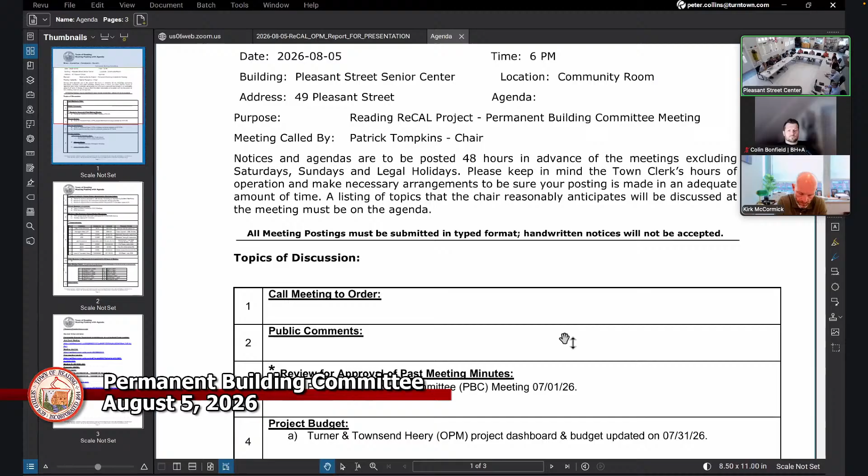So, first item on the agenda, public comment. Is there any public comment? Not seeing any - is anyone online with their hand raised or anything?

Okay, moving on to the next item, review and approval of last month's meeting minutes. I trust everyone got the meeting minutes and had a chance to review them. Did anyone have any comments or questions?

Yeah Pat, this is Kirk - it mistakenly says that I was present for the last one and I was not. Okay. Anyone else have any questions or comments?

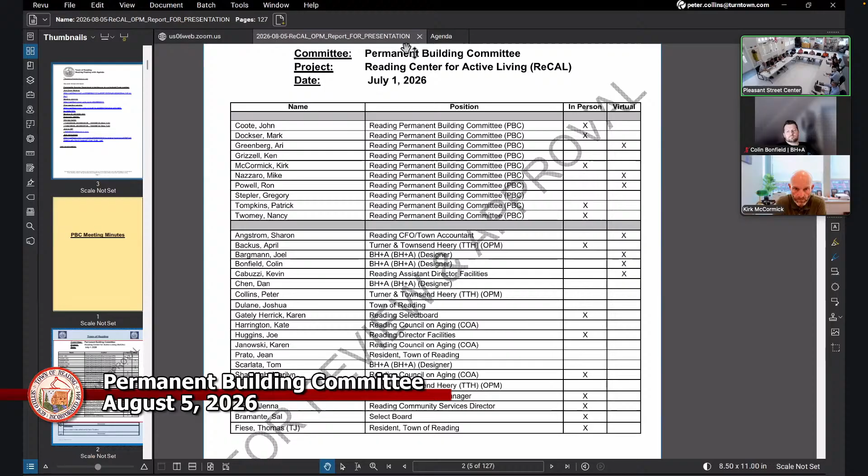Someone wants to make a motion? Mark's got that job tonight. Move to accept the minutes of, sorry, 7/1/26, as amended. Okay, so...

Any discussion before we vote? Nancy's not here, so I'm gonna ask Mike Nazzaro to vote in her stead tonight. So no further comments, go to vote: John Coote, yes. Mark Dockser, yes. Kirk McCormick, abstain. Mike Nazzaro, yes. Ron Powell, yes. Greg Stepler, yes. Pat Tompkins, yes. Motion passes.

With that, I'll turn it over to Peter for the project budget. Hey, good evening everybody, thank you. A couple of things on item 4, just 2 items: the dashboard and then the budget itself.

Jump to the dashboard, a little bit of an update to it. This is just a snapshot of the items within the budget and the schedule, as opposed to thumbing through multiple pages of the budget and multiple pages of the schedule. More details are certainly within the report itself. I won't go through every line item, but you can see column A and B. There's a couple of tables. I can scroll so you can see the full screen.

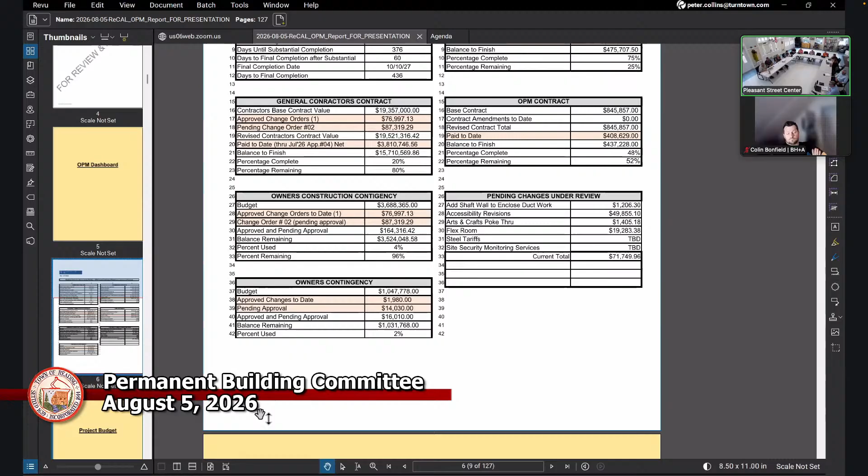And the other side of the report is just the designer's contract: the basic services, the reimbursables, the approved amendments, pending amendments, revised contract total, paid to date, balance to finish. You can see those numbers similar to the other side, 75%, 25% remaining. Same with the owner's contract, OPM's contract, excuse me, same numbers, same sort of formulas: contract base amendments, revised total, paid to date, balance to finish, percentage complete, percentage remaining.

And then the next part is some of the pending changes that are under review now. You can see them listed there, rows 27 through 32 in column C. So that's just a quick snapshot, one-stop shopping for information as opposed to thumbing through the other reports, which are also attached. I can go to the budget next, if there's any questions on the dashboard.

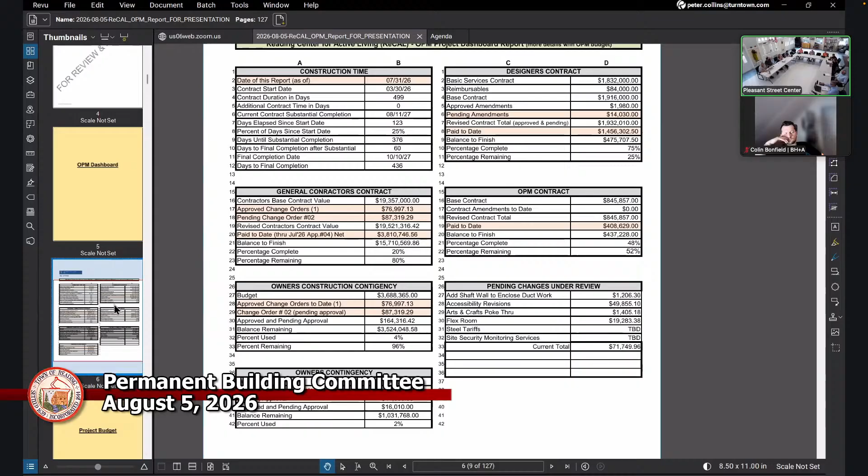Can you give a little explanation as to how you're using the owner's construction contingency versus the owner's contingency? What costs would it affect? You touched on it a little bit - we talked about it a little last month. Yep, I'm going to explain. So I thought it'd be worth you just explaining, in your minds, what you're doing there. Sure, so here's the budget report itself.

Maybe scroll up to start off with the construction contingency. It's shown right here on rows, cost code 500, 200, on row 218. The initial contingency was 1,097,000. We had some construction bid savings of 2.5 million. All combined is 3.6 million.

We turn around and against that, change order number one is $76,997. And quite frankly, I did not update change order number two - it should be 164,000. That was a last minute adjustment, which you saw last night. In any case, I'm taking anything related to the general contractor's contract with respect to change orders and managing the money as a construction contingency allocation.

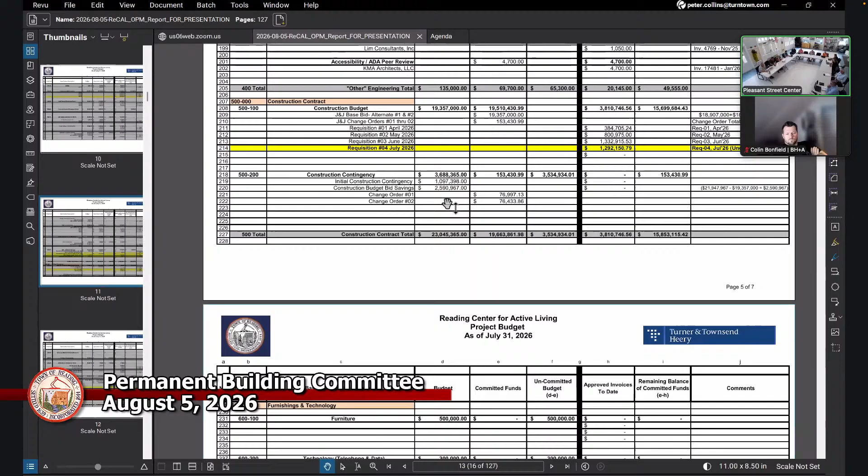With reference to anything outside of construction, I'm putting it down and managing it through the owner's contingency, down towards the bottom of the budget, cost code 800,000. Owner's contingency, again, the base contract was $1,047,000.

We moved some money around a little bit, as you can see here. I moved some money, cost code 300,800, up to additional services for the architect under Amendment 2, which was the $1,980. And what's it for? Over here on the right-hand side, under column J, it was the site survey benchmarks that we did a couple of months ago.

We also moved - what did I do next - then this evening, under rows 275, again I moved $14,030 from the owner's contingency up to the additional services for the design team, the A&E, under cost code 300,800. And that's what we're going to discuss this evening - that's for designer services related to the flex room and the maker space. So that's essentially how I'm currently managing the two different contingencies.

Anything nuts and bolts, construction, J&J, is construction contingency. Anything outside of that is owner's contingency.

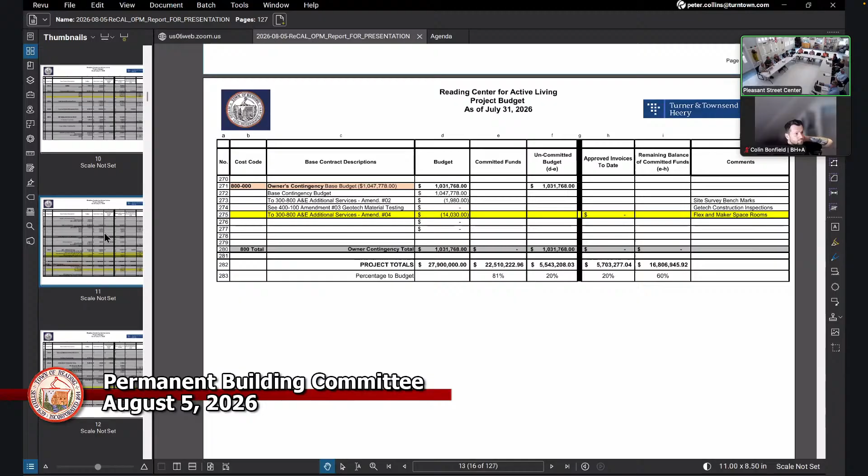Thank you. Questions - so, with respect to the budget on the report this evening, I'll just start on this page. No update besides what's highlighted in yellow and what we just discussed. Some invoices here that are highlighted in yellow.

Under the 300, 800 I mentioned, the monies were moved from the owner's contingency on row 167, cost code 800,000, owner's contingency, and we added it up here to 14,030, which is on the agenda this evening for further discussion to approve said amendment for the design team for those two spaces, flex room and maker space. They've also invoiced partial invoicing against those two amendments that the design team has already performed services on, which is another discussion this evening as well.

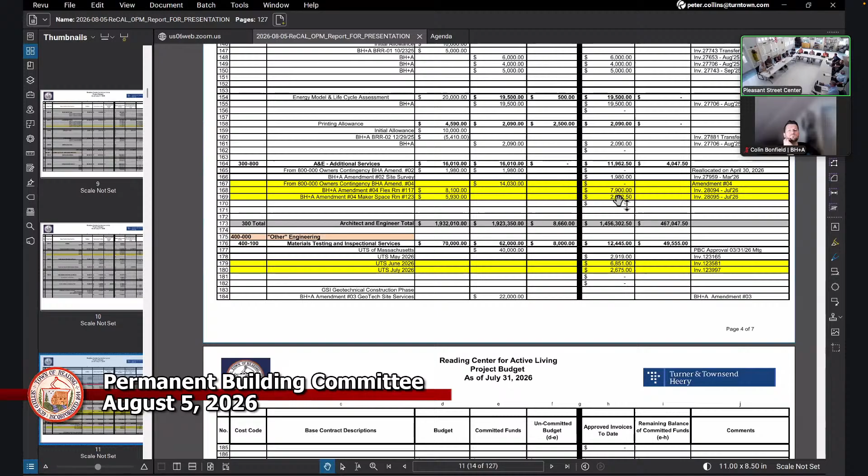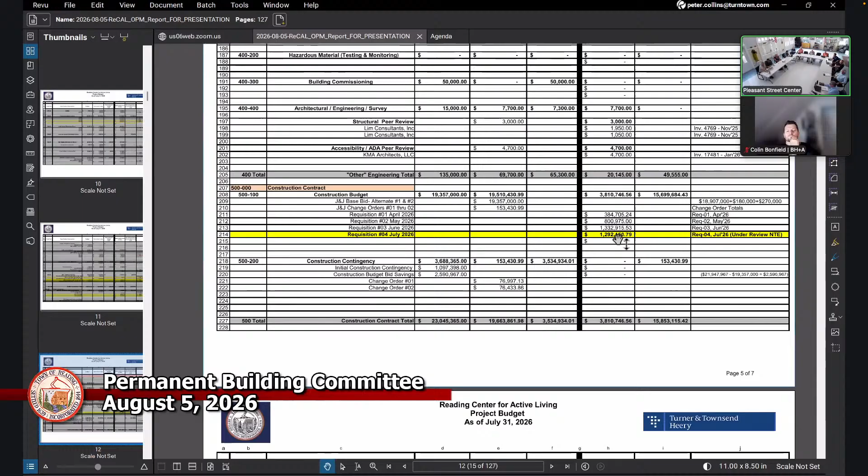Other highlights are the UTS invoices for presentation this evening, and the requisition for the contractor of 1.2 million, which we'll talk about. Then just the highlighted section under owner's contingency - that was just an added service to the budget tonight, so you can see quickly what was edited for this report.

So certainly ask any questions. That's what I have to mention on row item 4, the project budget, the dashboard, and the budget itself. Does anyone have any questions on the budget?

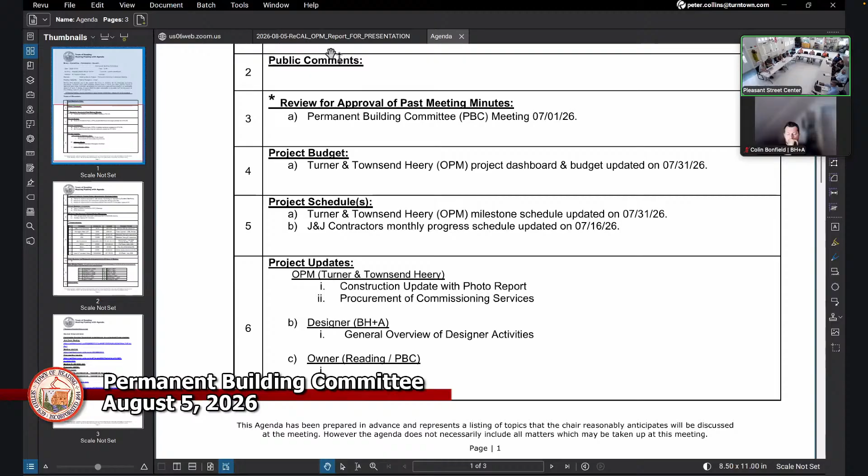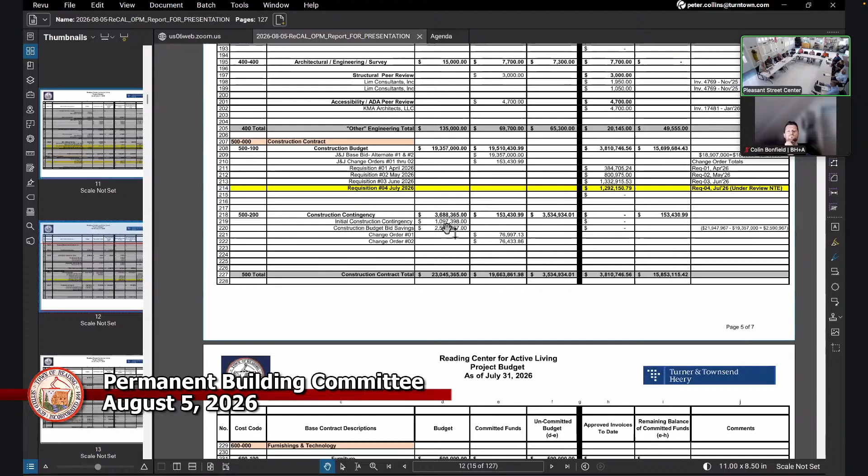You have two contingencies, owner's and construction, that's correct, but they share the same numbers. They're numbers which are repeated. No, they're different numbers. They look the same to me. One of them is much larger than the other - 3 times as much, the owner's. Both too much money, by the way. They're both too much. I'll zoom in a little bit, excuse me.

Construction contingency is 3.6 million. The original budget, when the project was established, was 1,097,000. I'll scroll over - the chart had change orders. Change order 1 and 2 are very close. Change order 1 was the 76,000 for the elevator.

You've got general contractor, so that's not a contingency. Correct, that's correct. So what I've done here is the base contract under the general contractor's contract - the 19 million base bid, base contract, signed them up. We gave them change order number 1 for the elevator of 76,000. We have a pending change order tonight of 87,000. All combined would raise his contract from 19.3 to 19.5.

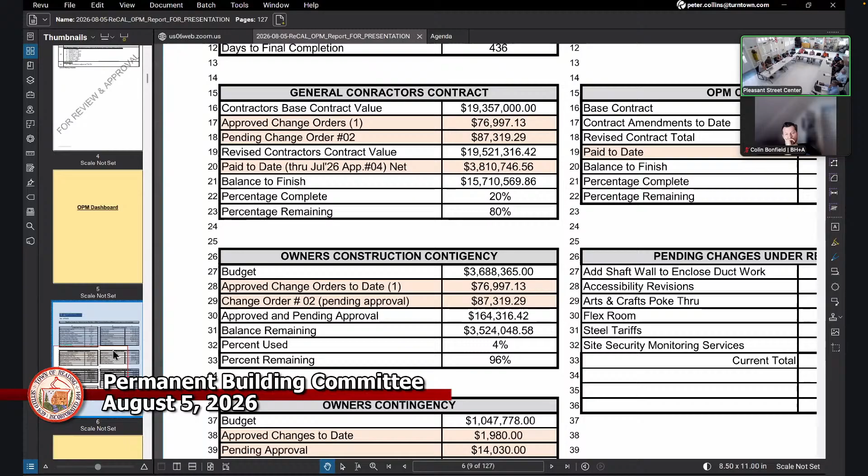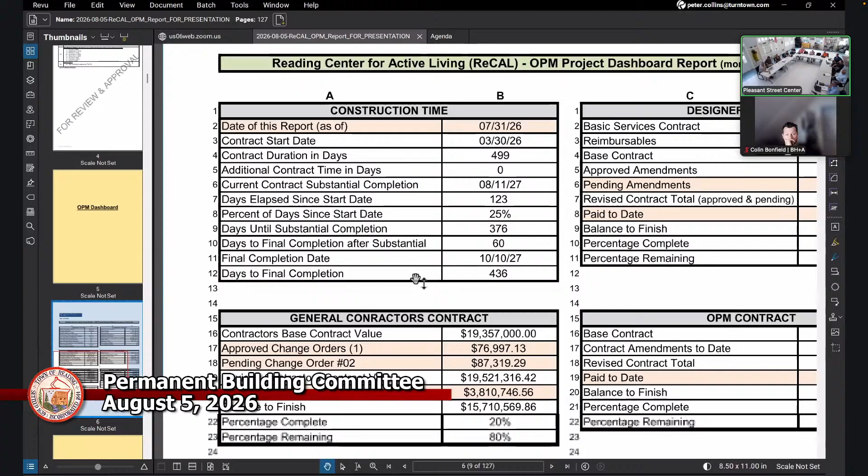So when the owner makes a change to the construction process, it shows up in the construction contingency. That's correct, yes. Well, let me say it this way - whenever there's a change order to the contractor, the money is drawn from the construction contingency, whether the owner makes the change, an unknown condition, an agency having jurisdiction - regardless of who makes the change or why it happens, those are the same. It comes out of the construction contingency because it goes toward the construction contract.

So the owner's contingency is where the design changes show up. Correct. So for example, this evening there's a change for the design team, or in the future if we're going to buy more chairs and desks, for example, we're going to take it out of owner's contingency.

It's very possible - they are doing different things, so I can explain a little bit about that if you want. Yes, just briefly. So they're putting into our owner's contingency the savings we got from the bid, and that's where we're holding it until the building committee decides how much of that roughly $20 million we're going to not borrow in the end. So we have about $6 million in owner's contingency.

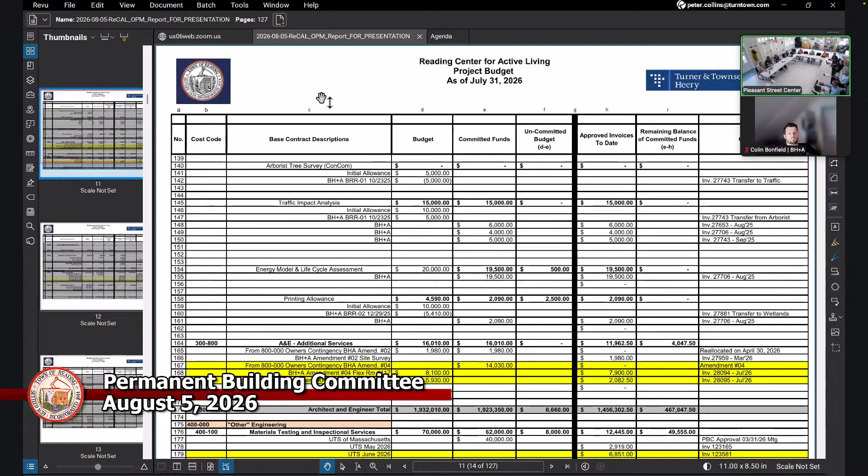Yeah, so I noticed Sharon is on the call. Hi, Sharon. As Jane was describing what's going on with the school and thinking about what not to borrow, I assume we should be thinking the same way here for this project in terms of what we don't expect to need to borrow.

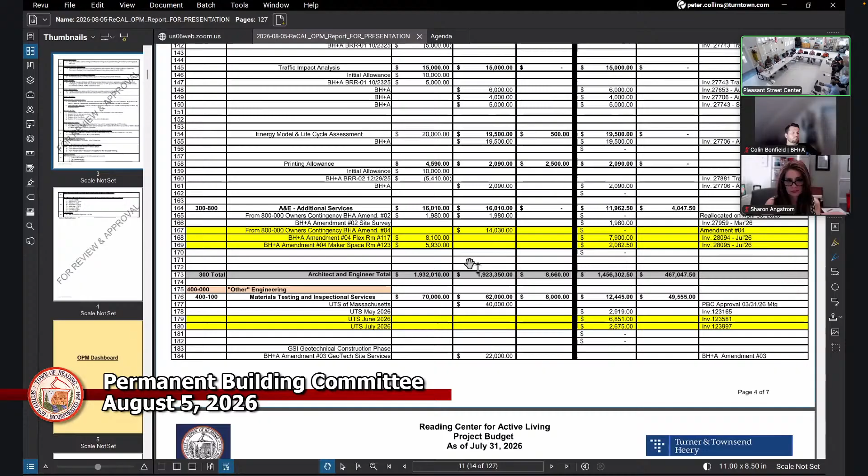It's less of a huge amount of money with ReCAL. It's not 20 million, right? If it's small change, I'd be happy to take it. Not for you. Not for you. No.

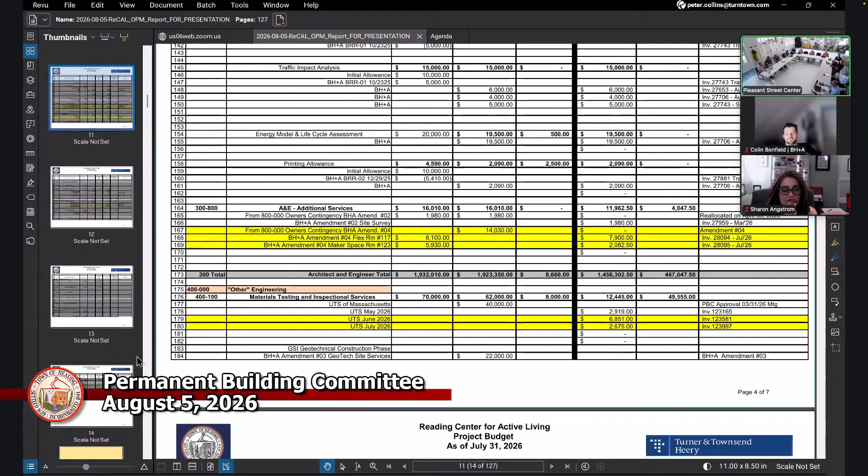I see your point, and certainly with the financial climate we're talking about in our community right now, just because we found savings in our construction bid, we aren't spending that money. Sharon, you can correct me if I'm wrong, but we've been talking a lot about this in the last couple of days, depending on what the Killam School Building Committee wants to do.

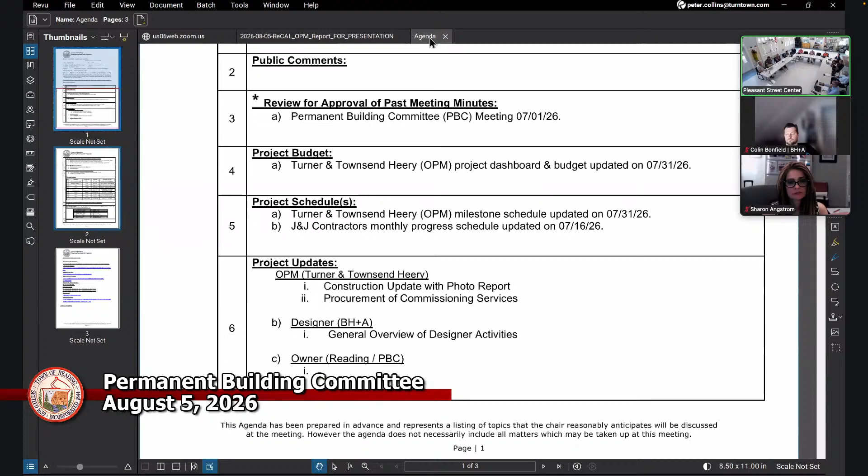Once they say maybe we give back 50% of the savings — give back meaning we just don't borrow it — Sharon will go to town meeting and officially rescind the ability to borrow it. It officially goes back to town meeting and says we agree you will not borrow this money. And we want lots and lots of assurances that there aren't going to be surprise tariffs, like another 25% steel tariff coming out.

So we take a very conservative approach. We stand by our word. We're not spending this savings. We're not going to say, great, you saved money, let's do something special and extra that we didn't tell anybody about. We're not doing that. But with the volume of savings, which is significant with Killam...

That's why we're talking about it here. And it's up to this building committee if there's a discussion about whether we want to do something differently with that savings, because it's not quite as much money. We haven't really broached that officially, but from the practical point of view, in terms of planned borrowings...

At this point, I assume — and Sharon, this is kind of a question for you — that you're not planning to borrow that at this point. So as you're thinking about what borrowings you're going to do and when, you're seeing that there's less than what was originally approved. Correct, there's quite a bit less that's been approved.

Sharon keeps our OPMs working very hard getting us their cash flows, because last year our treasurer raised $4 million in interest income from our investments. That's because she is very, very good with how she moves money around. So that's why the cash flows and other things matter.

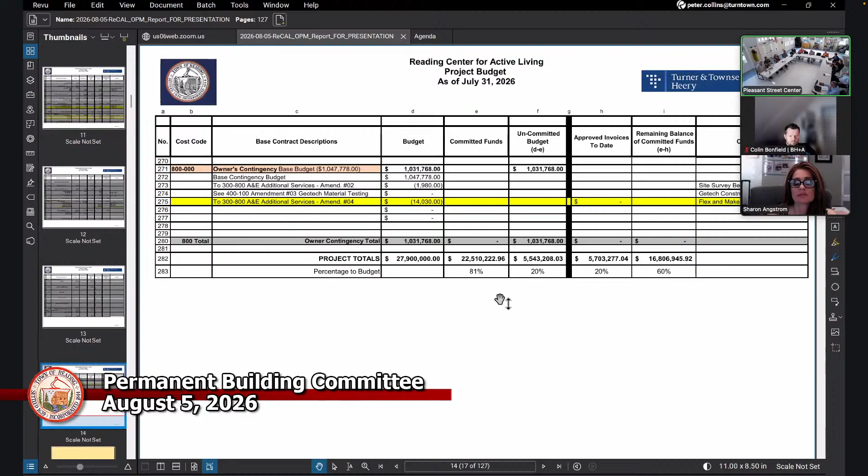I don't think it'll be more than that, between the OPM, the design work, and J&J's contract. J&J's contract committed is 19.5. Yeah, and I'm showing that.

You're right. Well, I think the other lines, it does come out to 5. It's committed funds, but we haven't bought everything yet, no, not the furniture. That means that minimally, the second tranche is going to be 2.5 million, right? Yeah, it's going to be more than that, because that doesn't include the FF&E, which we know we're going to spend and which will be significant, about 500,000. The second tranche altogether will be much less than the first tranche.

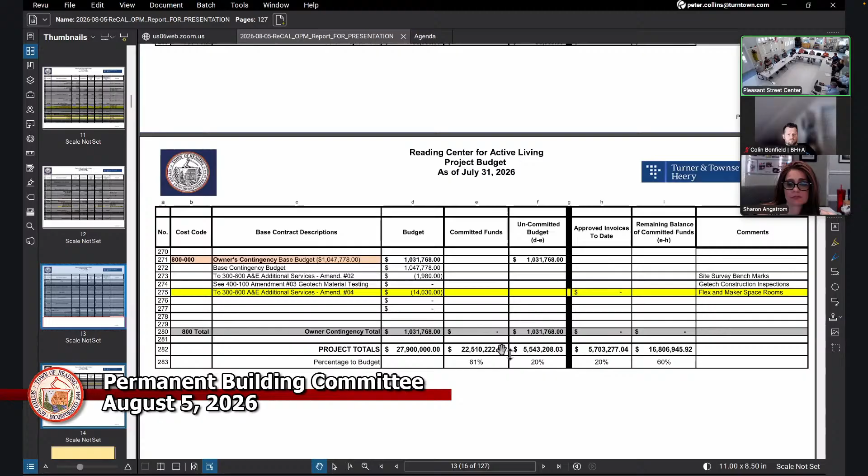People who open their tax bills in July kind of had a moment. The second tranche will not be anywhere close to that.

Okay, so as we target that 20 million in total cash flow. You know, Peter, that's probably something, total budget expenditures, we want to be. The best we can to be a few months out from seeing where that's going to land. We should be able to tell now from the cash flows. Probably some time, it's probably sometime in Q1, I would imagine.

Okay, anyone else, any questions or comments on the budget? We can move on to schedule.

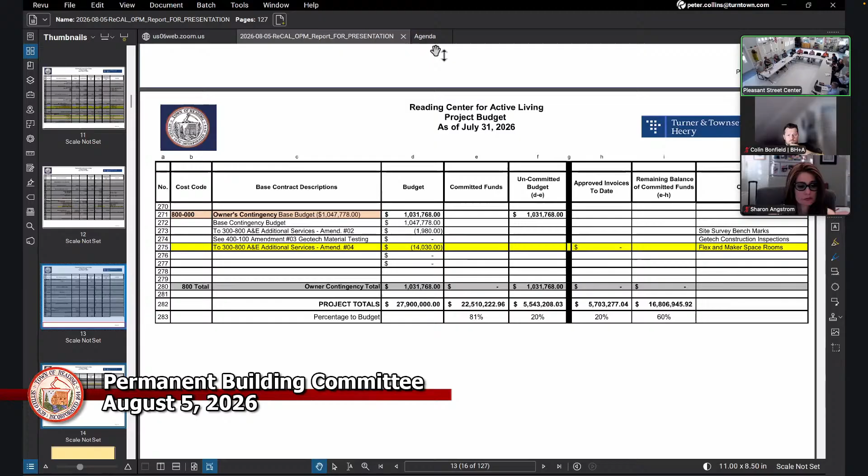Sure. Moving down to item 5, there's 2 schedules: the OPM's milestone schedule, and then the contractor's. I'll switch screens here. Here we are, here's the OPM's milestone schedule, kind of just a snapshot here. Where we are, where we've been, 30, 60, 90 days right here.

Concrete slabs are big, there was a big pour yesterday, over 250 yards, and that was all the zero slab. Now they're doing the depressed slabs. Sure, so that's probably going to happen Wednesday next week. Right, yeah, I think we have down to the 10th, and then you've got the wood framing starting later this month. It started to get things, actually started today. Okay, good.

So you can see, I won't go through all the line items, but that's what we're looking at on rows 51 through 56, with respect to ongoing activities.

I did turn around and, I'm going to scroll down a little bit, just to plant the seed with the group here, starting on row 71, which is the owner's furniture, fixtures, equipment, and then the technology. Kind of broke that out a little bit. Had a conversation with Joel from BH+A about the upcoming design, preparing the design, well, it's pretty much design completed.

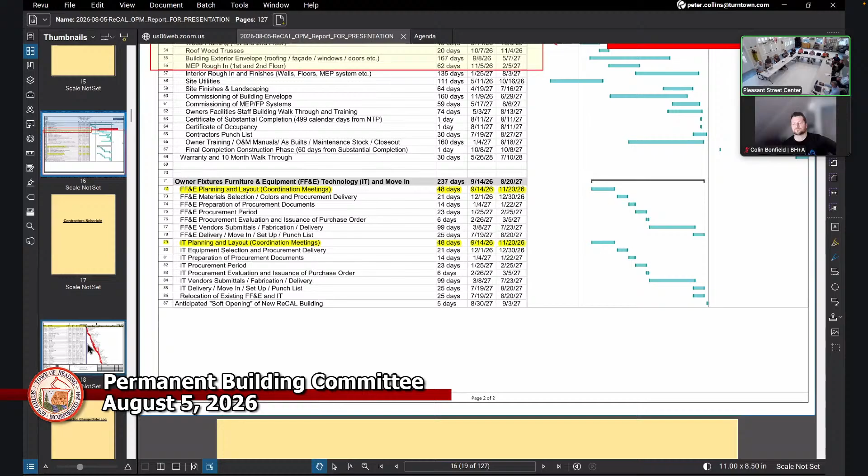He's from Maine. We had an early on group that did interior finishes. It might be nice to have some of those folks stay because you really want to coordinate the interior finishes with the furniture. That's a good idea. I think I know a couple of people.

Mark, when we're talking IT and infrastructure, that's separate, right? On the IT side, everything's in - all the wire and cable - but we don't have the copier or desktop kind of equipment. Sound systems and TVs we would have. Anything that's hooked into the building is in. Anything that sits on your desk is not in.

So how about things like routers? No, the router is not in. There's a central rack, an MDF and an IDF room, and anything that goes on those racks needs to be bought.

What about wireless access? That would be part of the contract. I think we have wireless access in IT - they are in scope, Joel. That's why we- there it goes.

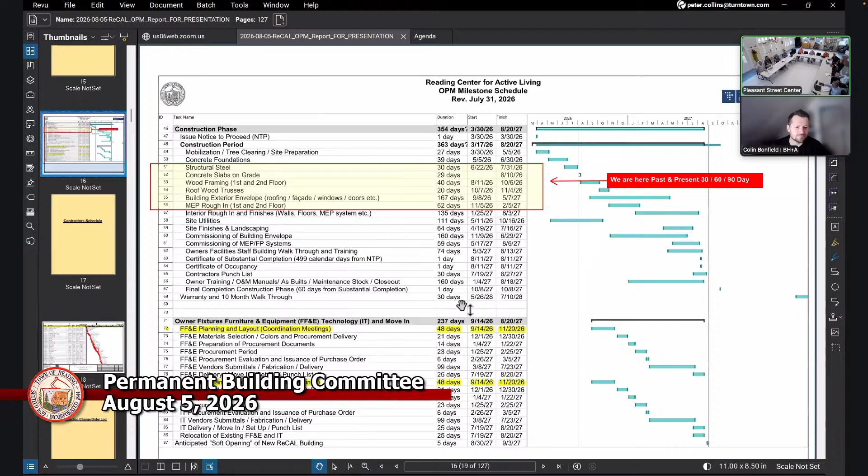Because again, those are built into the ceiling and wired back. Right, anything that's in the infrastructure should be in the contract. As we mesh that and go through with IT, we'll probably find some infrastructure we need to add, or some modifications we'll have to stay in front of, but we still have plenty of time for that.

All right, back over to you, Peter. We're still on schedule. So that's a snapshot of the OPM schedule. I'll give you the contractor's critical path schedule.

Maybe a question for the committee - contractors give us a monthly schedule update, probably 25 pages deep. I can certainly give that extreme detail to everybody if they want it, but I'll probably present the critical path schedule as a brief overview for this meeting and have the full schedule sent out separately if you want it. That makes sense - just so you don't get bogged down with 100 pages in your inbox.

So we looked at this - it's following the baseline schedule that we've accepted, and J&J is doing okay. Right now I'll use the word on schedule at this point. Some things maybe not 100%, some are ahead, some might be slightly behind, but in the grand scheme of things they're on schedule as planned.

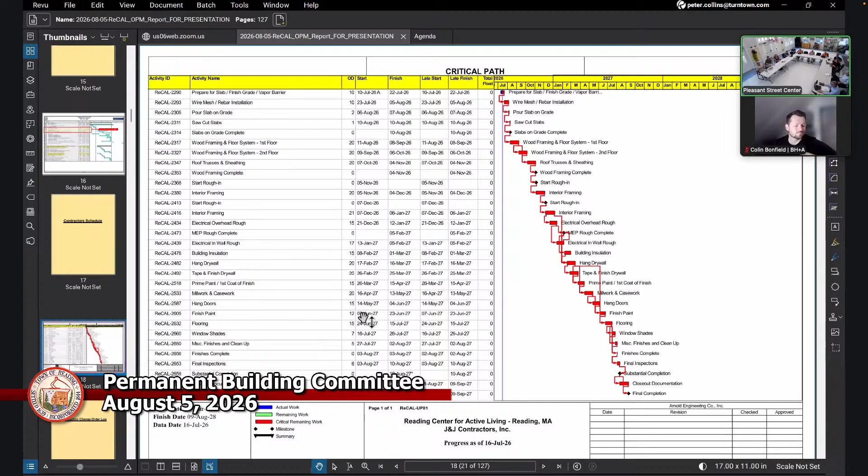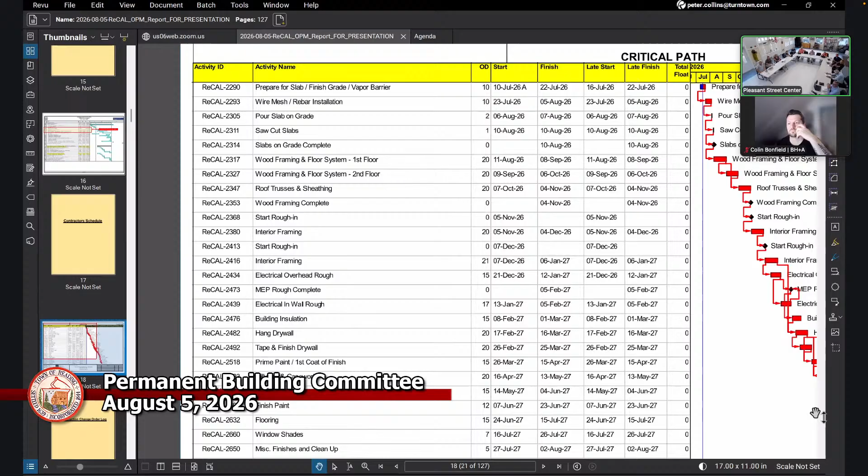Can you blow that up a little bit, so an old guy like me can read it. Whoops, one second. I broke my glasses. I'm using my computer, like I can't see that - it's a mess. Scroll down a little bit, Peter.

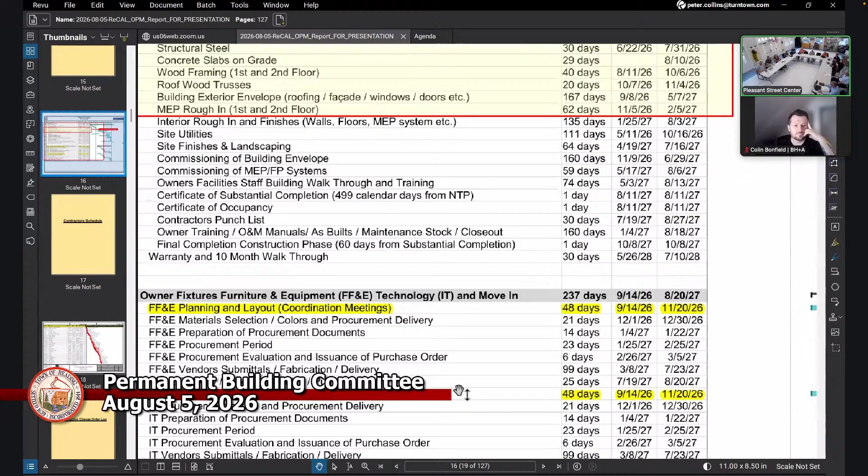I have a question for the team - maybe this is out of order. What is the distance between the time the building's effectively done, the punch list, then being complete, and then when we're going to move in? I want to know what month I'm turning this building on and how much it's going to cost me, because I'm carrying a full year in the budget, but I don't know that it'll be in it a full year, you know what I mean?

I would say currently, the substantial completion date for the project is August 11th, 2027 - that's the contract date, almost exactly. If nothing changes they could finish earlier, but contractually, unless there are edits, from the start date of March 30th of this year plus 499 days is August 11th of next year. At substantial completion, that's when essentially the keys get turned over and all ownership of the building gets turned over to the owner, in this case the town of Reading. So the owner's insurance would kick in around August 11th, and the utility cost gets turned over - ownership of the building and all its accessories transfer to the owner on August 11th next year.

So with respect to when do you start paying the bill - when do I start paying it? August 11th, unless we agree either that there's a substantial delay and it gets pushed off, or the contractor finishes early and we agree to accept it early.

But we'll know that. Not right today, understood, it's a year away. Okay, and I would guess so that's the date we're starting to move furniture in.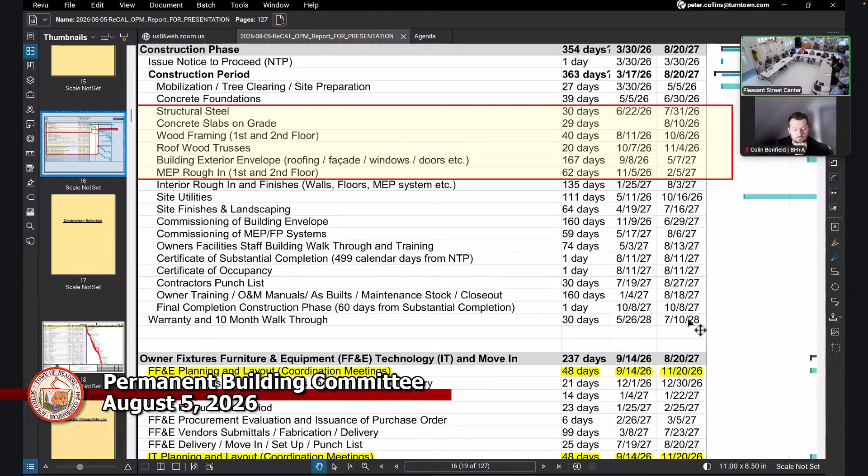Well no, this is my timelines, just me mapping this stuff out. I'm anticipating the owner move in furniture and equipment on row 78 and start July 19th, a little bit ahead, maybe 3 weeks. There'll be some overlap, coordinated with the contractor to make sure the building can accept the furniture arriving and rooms are ready.

Traditionally, contractors usually have a lot of the space 3 to 4 weeks ahead of substantial completion. That's when we start to map out and the owner can start to move in concurrently with some of the finish activities of the contractor. Otherwise, if we waited until the final completion date, 60 days after substantial contractually, that's October 8th. We don't need to wait until October 8th then move furniture in for a month, making it November 8th. We can work concurrently at the same time.

So assuming that overlap, what are you anticipating for actual occupancy of the building? Well, I was gonna say we start moving in with a more conservative approach, no overlap. We start moving in on substantial completion, like 30 days out from that. If I mapped out what I just said, I'm looking at an anticipated soft opening.

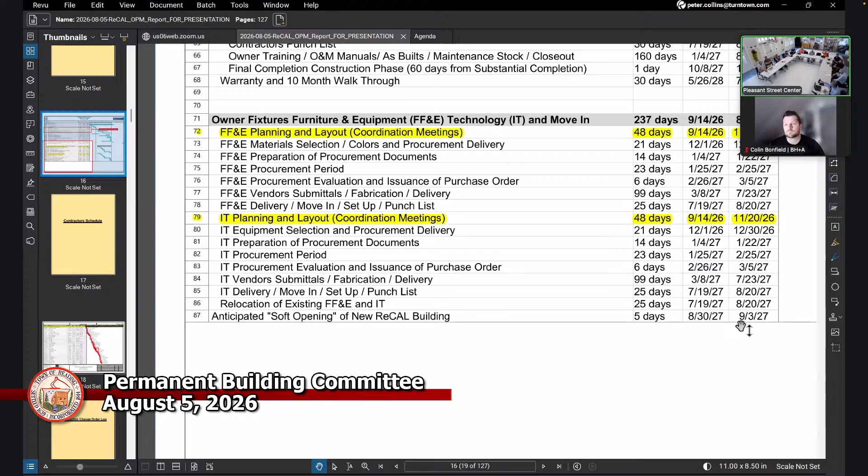That's why we were trying for that. We might shut down operations here so that staff can get set up over there, exactly, and understand how to run the building, maybe take a day off or something.

Sure, or get going. It's only happened once, but the other advantage of what Peter's doing is that if the fire department wants to do a walkthrough with the furniture for egress, they can do that. If they walk through when generally there's no furniture, there may be an obstruction they don't agree with. That's right. Right, fine.

The other thought here is relocation, the last row is relocation of existing furniture, equipment and technology, yet to be determined. I'm not sure exactly at this moment what is being transferred from existing buildings such as this to the new facility.

That'll all come out in the planning of the FF&E and the technology as well, deciding what's being kept, what will be surplus, what might go to other town buildings.

Anyone else have any questions on schedule?

So those are the two schedules. I'll turn it over now to project updates, an opportunity for some updates. I'll let April give the committee an update on construction, and then the design team BH&A can share any activities they want. I'll stop for a minute. April, I'll move down, I have some photos that you prepared, the photo report.

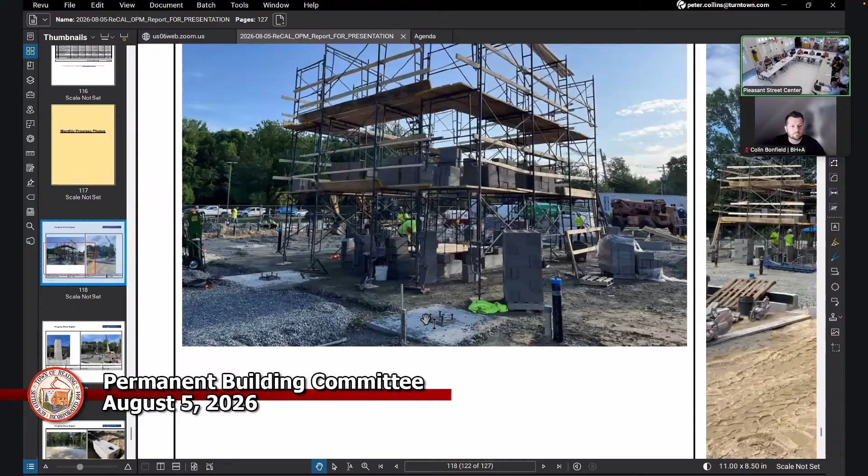One second. While Peter's doing that, I can give you a quick 3-week look ahead. So J&J is continuing their drainage to the Cultec, and concrete work, the flat work is continuing. Next Wednesday should be the final pour, and wood framing started today. So everything is moving right along.

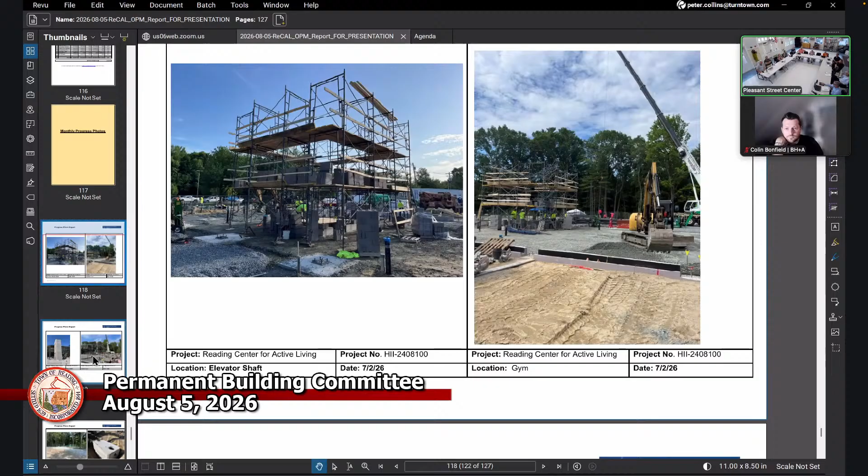Oh good, thanks Peter. So these are just a couple of the photos. That first photo is the elevator shaft, just when they very first were starting it. The second photo is the very first piece of steel. It's hard to see, but the very first piece of steel is where all those pink shirts are.

Sorry if I jumped ahead. Tell me about it. No, that's okay.

And that's the elevator shaft done. And that's just a progress photo of the steel. They were fast, very fast. They were very good.

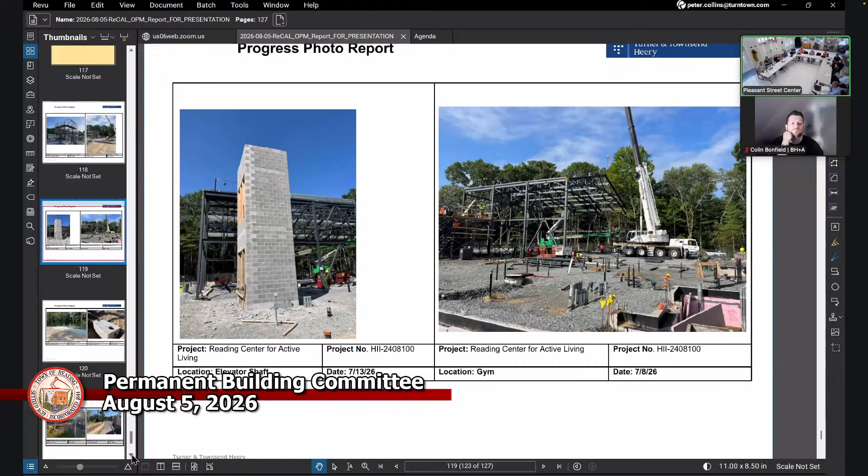You can tell me next slide if you're ready. Yep, next slide please, thank you.

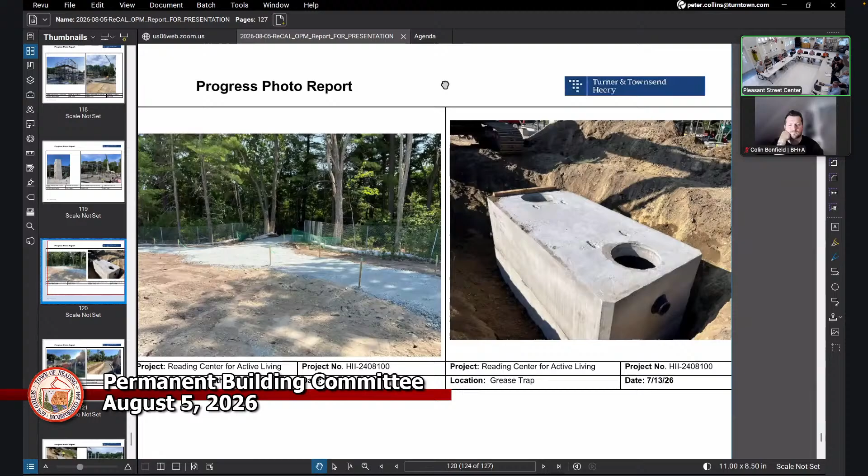That is the walking path in the back. They started to connect to the pickleball stuff. And then the grease trap went in on the 13th, and the plumbers have made connections to that already.

Next slide. And then that picture is the water main over at the ice rink.

Ed has been absolutely phenomenal, a wonderful neighbor. Yes, Burbank - he's been wonderful. So we went in the night before, at the end of the day, and said hey, we want to do this tomorrow, and he was like, yeah, okay, sure. He's been wonderful - we can't ask for anything better.

He has allowed a storage trailer in the back - they stored a whole bunch of the manholes there. He's been very helpful. Every time we have to do a detour he'll stand out there and watch for the kids because there's trucks going around. He's been a phenomenal neighbor, so yeah, we kind of invaded him to do that and he was great with it.

And then the next slide is taking up the asphalt on the road right in front of ReCAL. Next slide please, Peter.

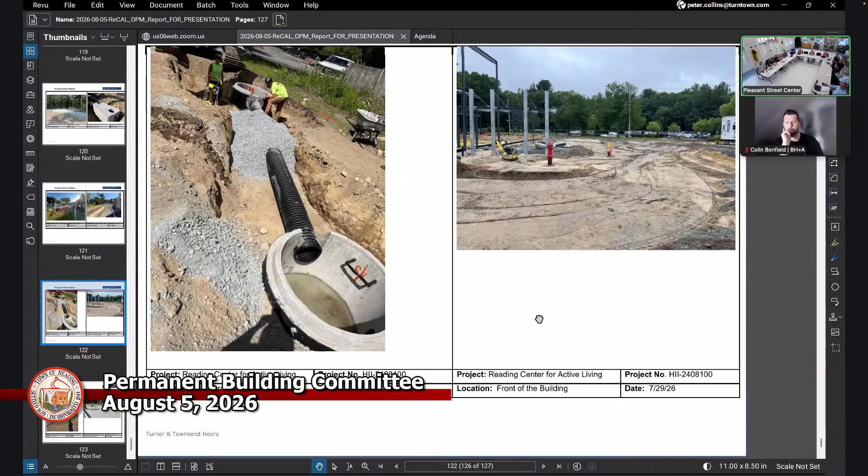This is some of the drainage in the road that is going to go back to the Cultec. And then they have the fire extinguisher connection in, which actually came from the connection of the water main over at the ice rink, so that one is already in.

And then I think we have one more slide, Peter. That one was just a picture of the final steel, and then that was concrete poured yesterday, right at the front of the building, right after we buried the time capsule.

Yeah, so that was a long day, a very long day for them - 200 and I think 256 yards of concrete. Seems like a lot. It's a lot.

So that's that - they're moving right along. It looks like a building now. It does, it's really happening.

Thanks, Peter. We'll talk about procurement of commissioning services. We have an RFP that we've assembled - that meeting might have seen a draft of it. Still working on it with the procurement office, Josh and Katie, so looking to get that out maybe next week, but no less than two weeks away to publicly advertise.

If anyone on the committee has comments on the documents sent out, do you have a deadline for when we should get that information to you? Yeah, if they want to get it out next week, that's a little too aggressive because I want to work with the procurement office on the model RFP they want to use. So let me say a week from today, next Wednesday - I'll put an email out on that to the committee. That'll be more generous than I was - gotta give it till Sunday night, now for the weekend it's not gonna happen.

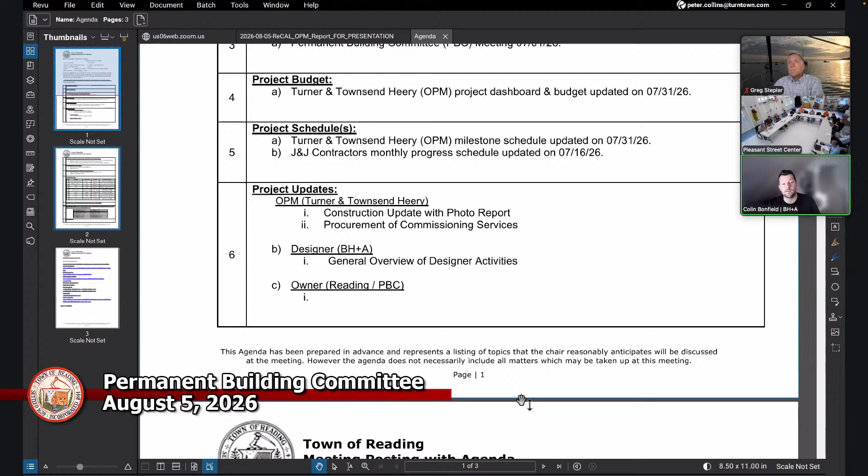Colin, you were saying something? Yes, I have actually changed the color in the building information model that we use internally, the architectural model, so you can actually see now what it would look like in this haze gray. And it really is pretty sharp. It looks good. Do you want me to share a screen?

Want me to stop sharing? Do you want to share? I'm on my laptop, not linked into my desktop right now, but I'm happy to send out an updated rendering later tonight. That would be great - can we get a side by side so we can be reminded of the original? Yeah, absolutely, I can do the matching, white and haze. Make sure you include that window. It's in there.

That design option was accepted on the architectural end as far as the modeling software, particularly the longitudinal scheme.

Anything else from the designer side? The windows came in with the windows that were spec'd. There was a lot of discussion with it. At the end of the day, we got the Intus window, which is a very good window. They tried to do a substitution and we were able to shoot that down.

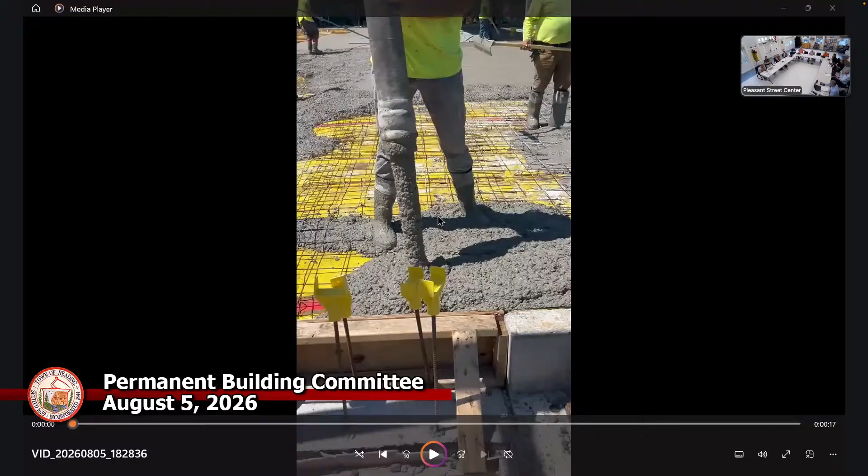Is it? Yes. So you can see that green pipe with the two - that was it? That was it, yeah. Very quick, very quick. So we're gonna put on the as-built where it is. Remind - concrete is not full, it's base. And then second - boy, we're learning a lot tonight. We are, I'm learning a lot, like every day. Thank you, Josh.

Okay, moving on. There we go. Item 7 - so a couple of little adjustments here.

First one is a site security monitoring system. It's actually now rolled into change order number 2, which was updated probably 24 hours ago. So why don't I go to that right now? Here's the construction change order.

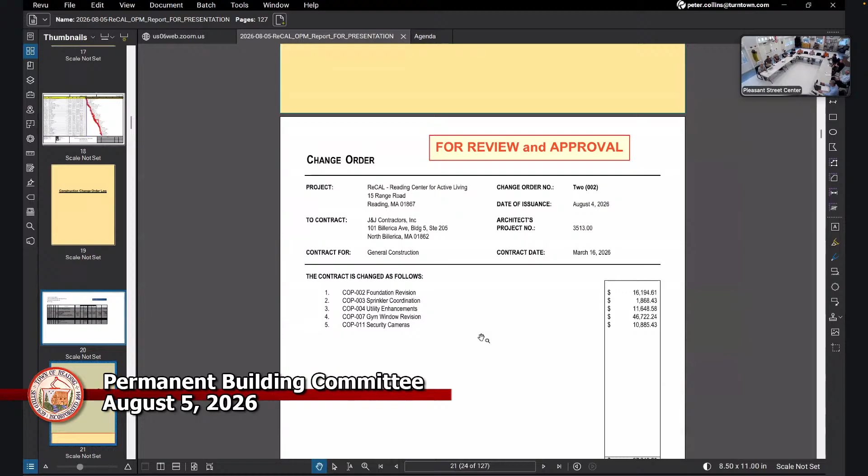Here's that quick log, just to share with people how we're tracking it. I didn't print out the whole screen, excuse me, but we do have it, we're tracking it as we talked earlier. We have a log, wanted to share that with people. The change order itself, construction change order, is for tonight's review and approval. So we have 5 items or COPs, change order proposals. We've reviewed these with the project team, which included Kevin Kabuzzi and Joe Huggins, as well as part of discussions at various times. Number 1 is foundation changes, number 2 is sprinkler coordination, number 3 is utility enhancements, number 4 is the gym window, and number 5 is the security cameras and monitoring, which is a requirement requested by the builder's risk policy.

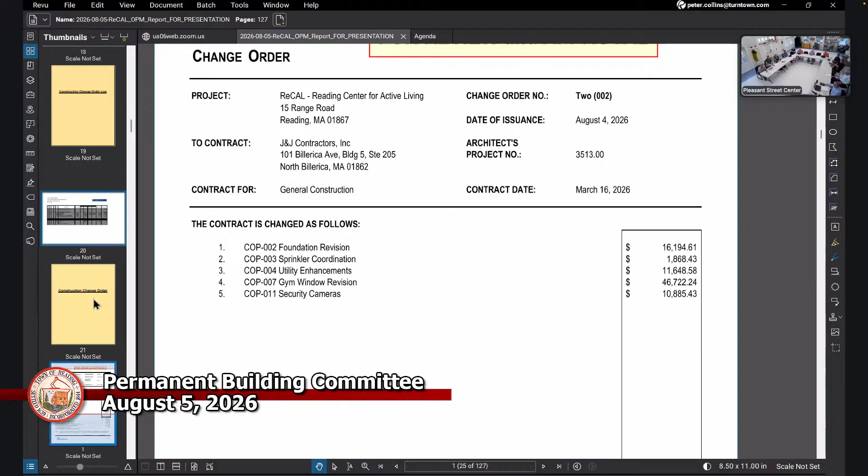And I can scroll down, we have all the backup here. You probably saw this in an email last night - that was an updated version. Everyone should have gotten the original version. Yeah, we got the original version last Thursday. This was from the Tuesday weekly meeting that we had.

So then I'll go to the security camera item here - here's the backup to that. This has been reviewed also with the procurement office. Katie and Josh are aware of this because they know the security requirements, which is part of the builder's risk policy. They had a much larger number when they procured the security cameras for some reason - it was bonkers when we procured it, we don't know if the scoping was incorrect or whatever, but the same company came back about $100,000 less. So yeah, it was outrageous. I called the insurance company and gave them what for. So this was the right move, just to go with this, because you don't know what the difference was.

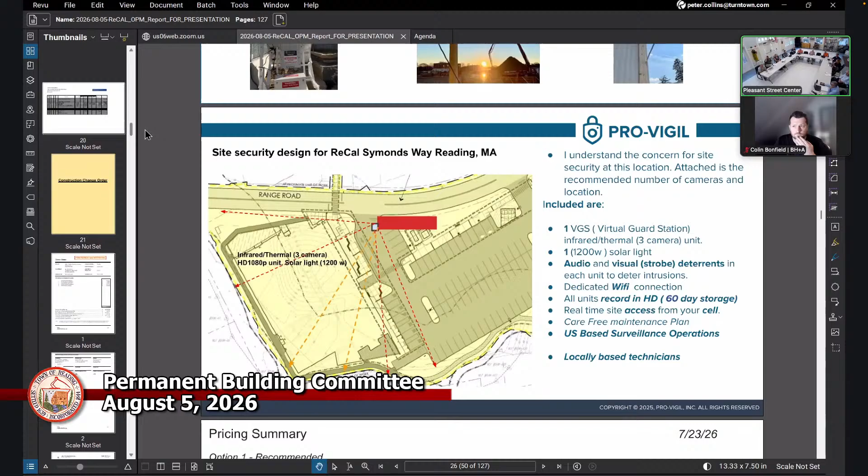But there's also - it's interesting because in the insurance industry, certain companies have bought into insurance companies. They invested in insurance companies like Flock Camera Systems and so forth. So it's interesting to see how requirements are also changing in some places. I think that may have been a factor.

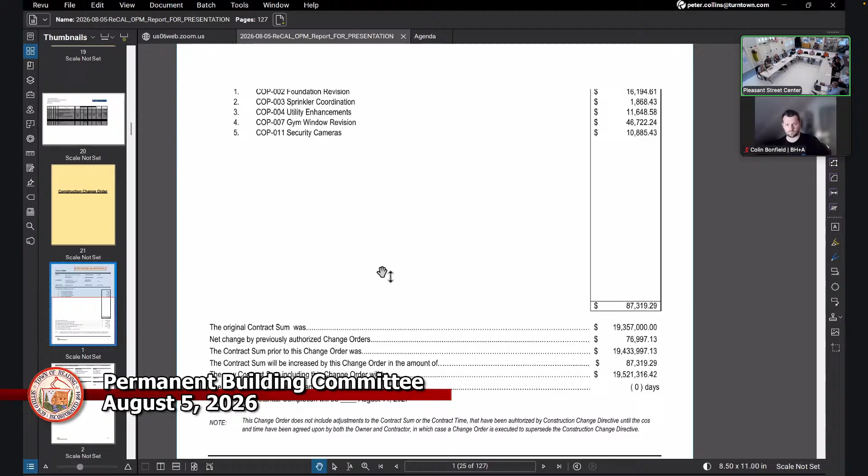Yeah, I can talk about this one quick. This is an interesting one. It originally came back at nearly $50,000, and the reason was a footing in the structural drawings was erroneously tagged using a datum point that was off by 1 foot, so all the footings throughout the project were showing 1 foot higher than they were intended to be. All that said, the details were correct, the sections were correct, everything in the architectural drawings was correct, so they did not really have much ability to argue that it was unclear and that the extra costs for excavation would be a valid change. So we pushed back on that and got all of that cost removed from the change order.

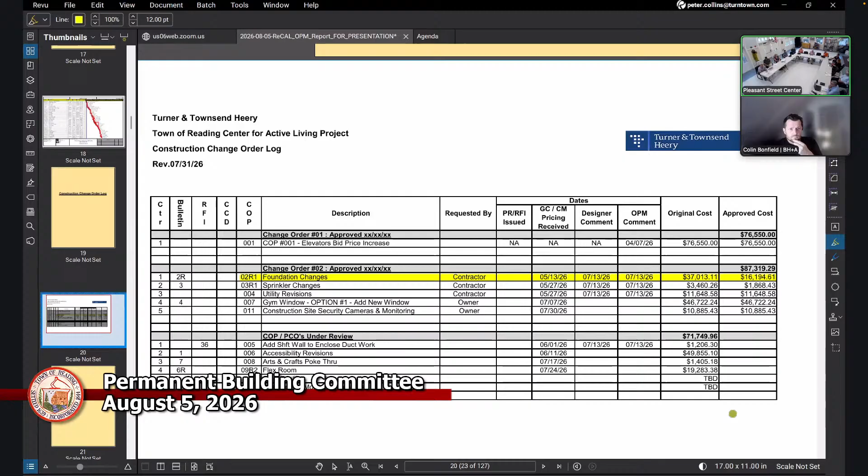So this is for bringing footings, it's not for changing elevation. Changing elevation doesn't work - correct. The title shouldn't change, just for - yeah, we can do that, because it came in this way as foundation changes, so that's what we just kind of tracked it, but yes. Not provided from the footing, or those footings, it's added spread footing to them. Fair enough, that's what you're saying - yes, that clarifies. That's what I was seeing.

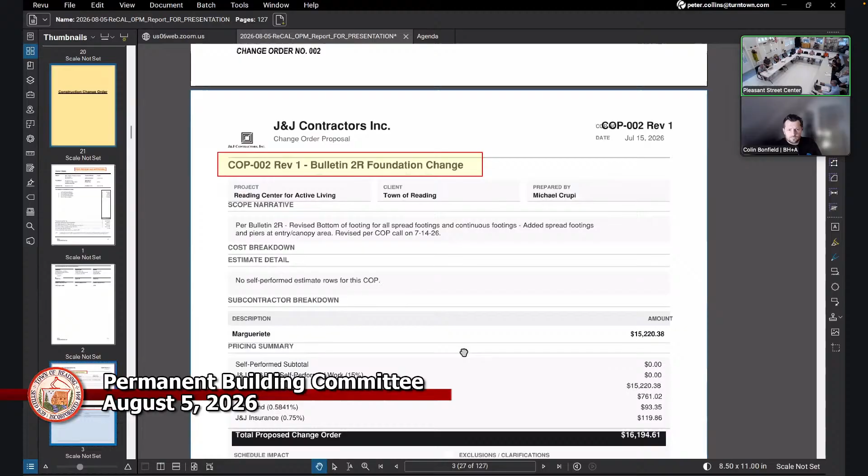I would actually prefer the description remains the same, so there couldn't be any confusion that the variation from the 37 to 16 is still on the table. I would prefer that the description stays the same as it is - no confusion. Everything that was part of that bulletin, everything that was part of that is included in the 16,000. There's no coming back. So, one big clear is my logic.

I don't know if anyone has any other questions. If not, I'll entertain a motion to approve J&J's change order number 2. Motion to approve change order number 2 as presented. Second.

Anyone have any questions or discussion? Hearing none, for the vote: John Coop, yes. Mark Doxer, yes. Kirk McCormick, yes. Mike Mazzaro, yes. Ron Powell, yes. Greg Stepler, yes. Pat Tompkins, yes. Motion passes.

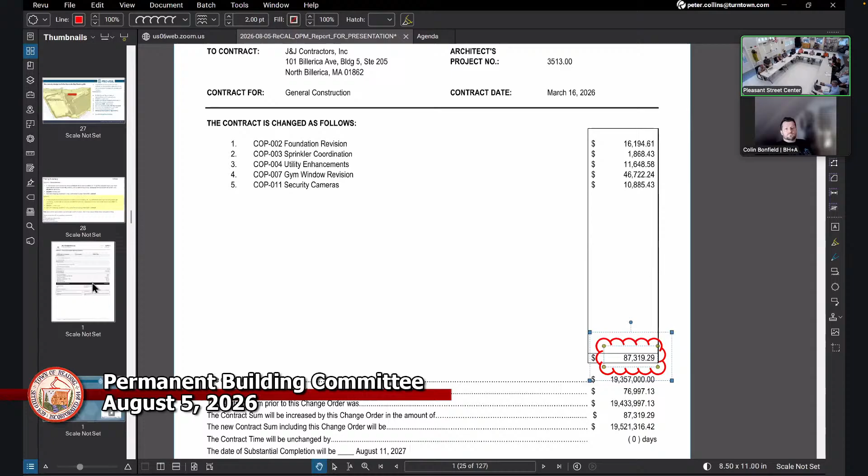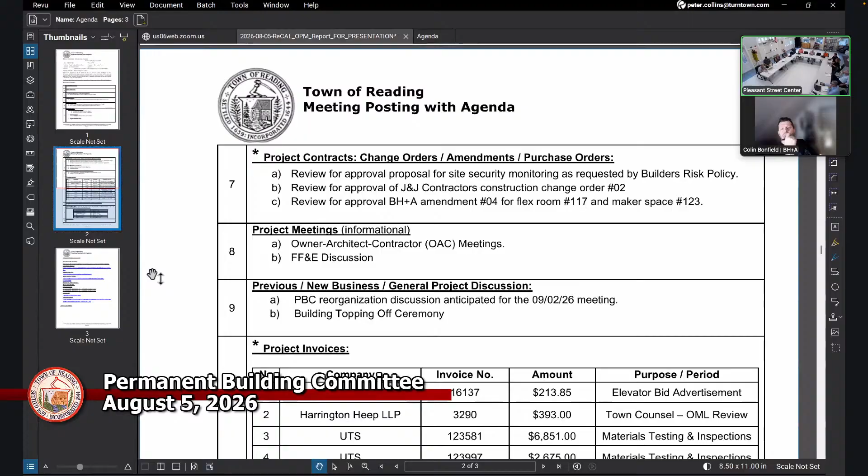Thank you, committee members. I'll scroll down to the next item on the agenda, which is amendment number 4 for the design team, BH+A, for 2 design changes that took place previously as approved in previous meetings, from the Flex Room 117 and the Makerspace 123. Here's the designer's amendment, here's the cover sheet for it, which shows that. And then here's the backup, which explains what took place from the design team's submittal, proposal, excuse me.

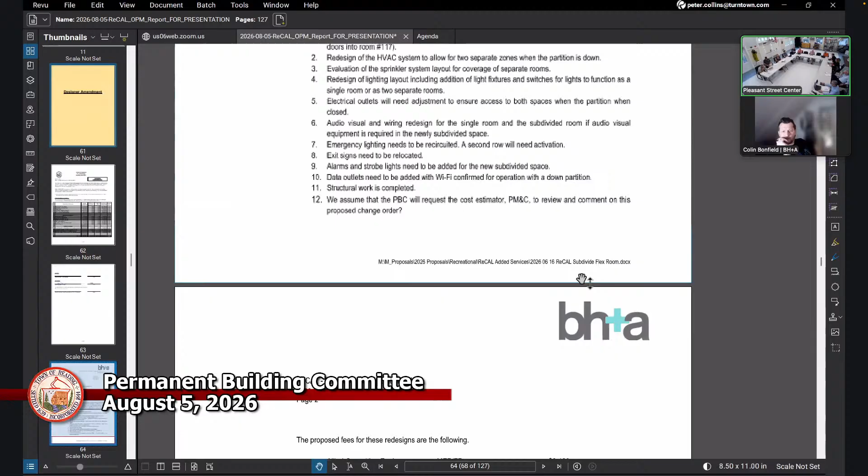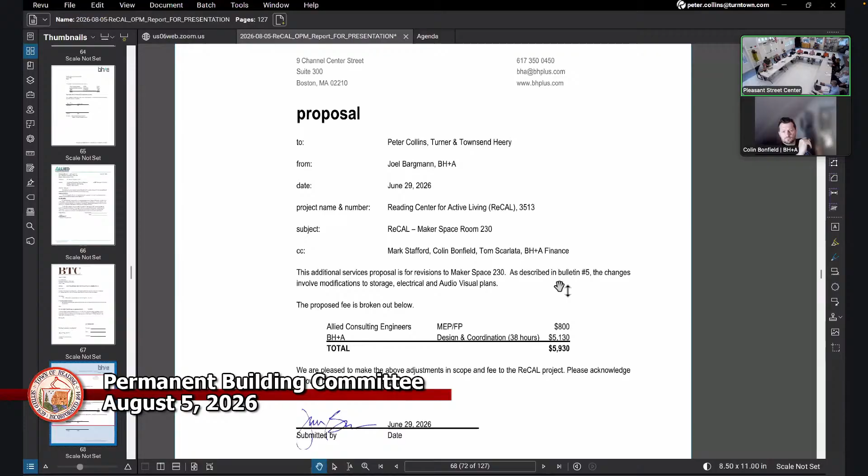$8,100 for the flex room changes as discussed in previous meetings. And then there's the backup for the sub-consultants. Then there's, excuse me, there's another one here for the Makerspace, $5,930. And that went out about a week ago, so everyone had a chance to look at it.

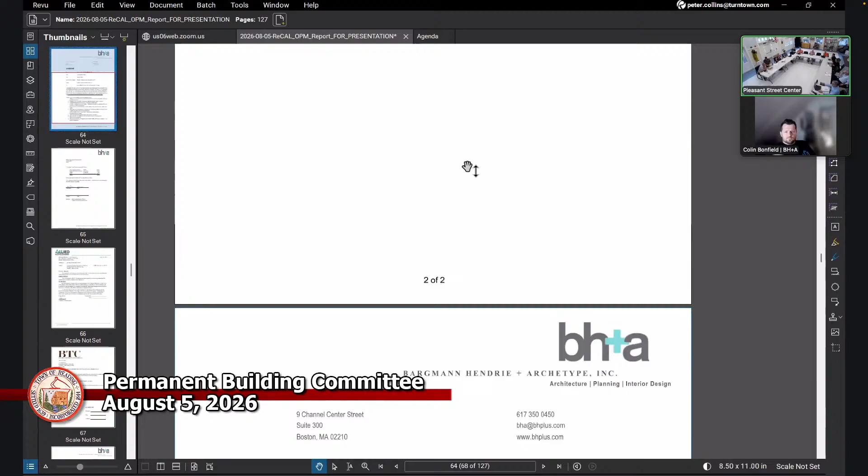So anyone has any questions before we vote on that? That'll be right here, I'll include it since the value. Ron? I just have a question on the flex room.

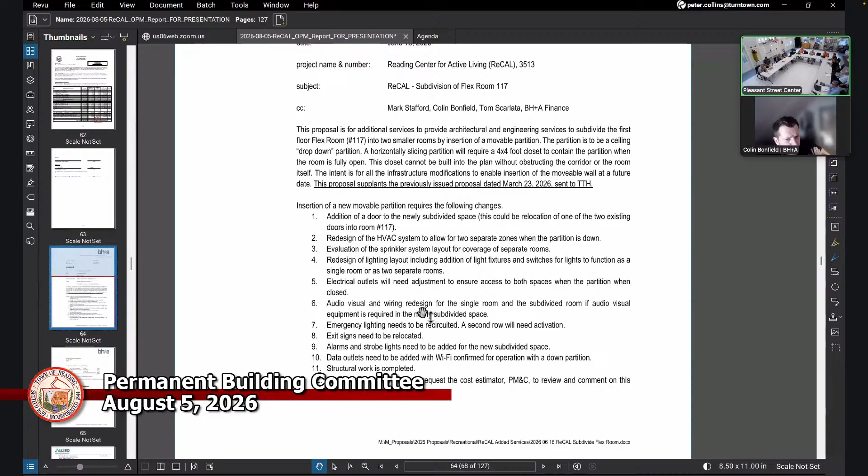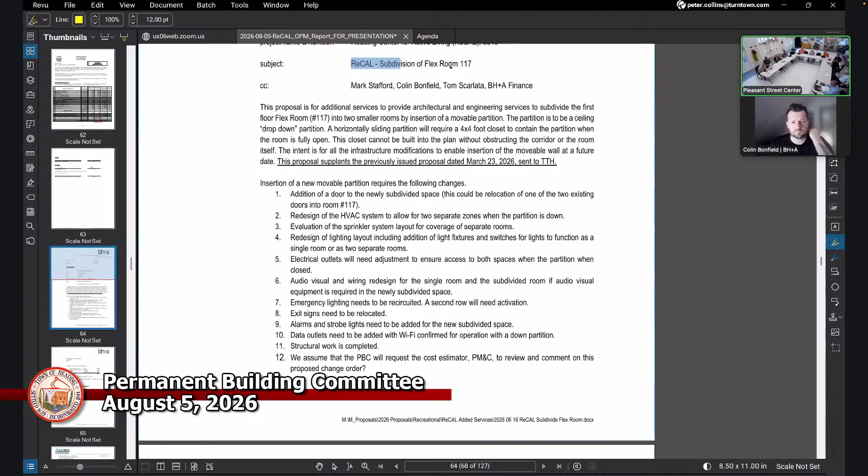Sure, I just noticed that there were items listed on the March 23rd analysis, and most of those were listed on this one as well, but there were some additional ones. I just want to make sure that the $39,200 that was part of the original analysis encompasses all of the enabling work, and that there's no additional costs beyond that.

That was an estimate, I think our OPM team did that. I'm going off memory, if it was in March, 39,000 might have been the cost we looked at as the OPM for the construction cost. They produced an estimate. I don't recall if the architect did, but we might have put an order of magnitude together very early on.

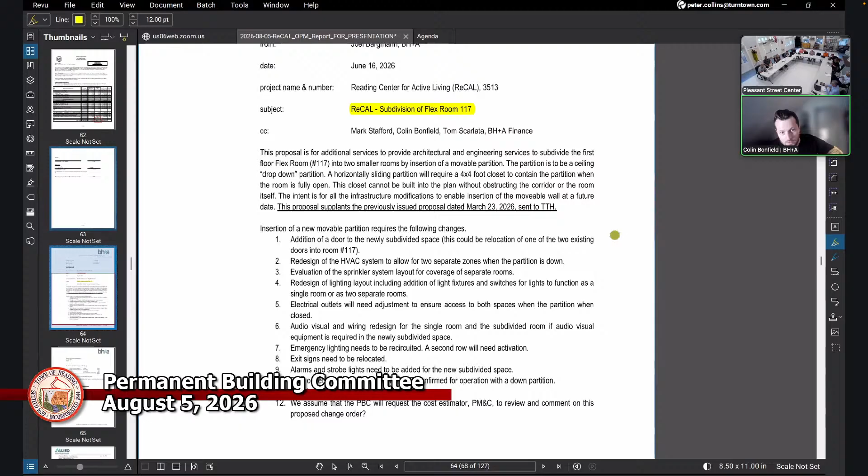Designer items, so is the designer going to add a door or exit light? I'm looking down this list, all of this stuff, except for the actual operable door to subdivide the space, was part of that bulletin. We've separated the room for future proofing into two separate zones. We did rework the light fixtures, the emergency lights, the exit signs. AV infrastructure has been added. Even some fire protection was shifted to allow us to put a door in the future. Horn strobes, alarms, all the infrastructure in that room has been treated as if it will be two separate spaces in the future. All of that was done and revised in the bulletin that went out for this change.

Just to be clear, we're voting on an amendment to BH+A's contract to perform this work, which they've in good faith already gone ahead and done. Most likely J&J's change order 3 will be the actual costs from the contractor to perform that work. Correct. This is strictly designer services, not construction costs.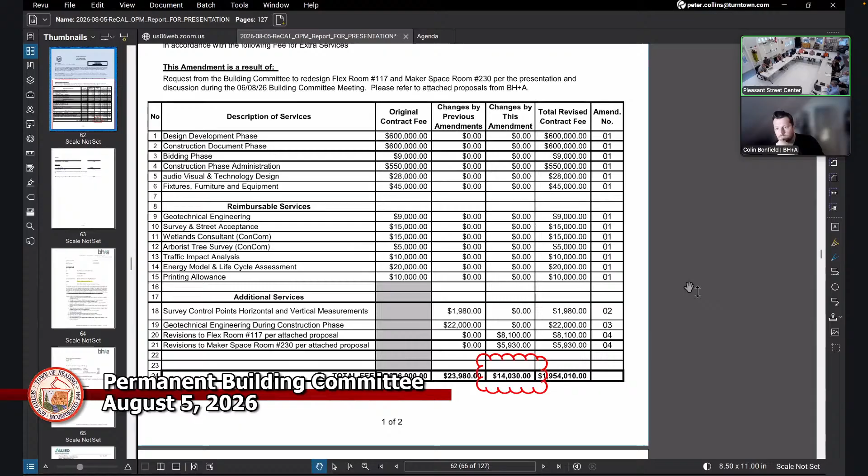So the amendment has two designer services: the flex room 117 for $8,100, and the maker space room 230 designer services for $5,930, summing to $14,030 as amendment 4 under the designer's contract. Unless there's any other questions, who wants to make a motion to approve?

Can you just scroll a little bit higher so I know the wording to use? Sure. Motion to approve designer amendment number 4 as presented. Any discussion or questions? Seeing none, let's go to the vote.

John Coop, yes. Mark Doxa, yes.

Anyone wants to mute Karen Herrick, that would be helpful.

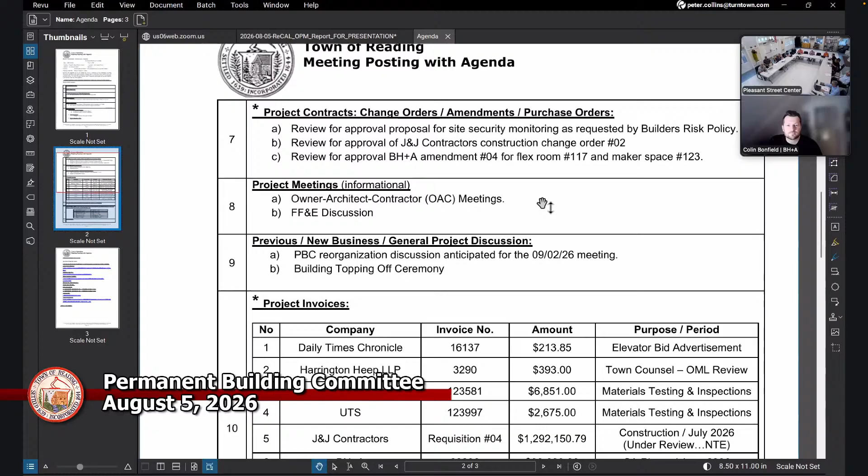Kirk McCormick, yes. Thank you, Mike Mazzaro, yes. Ron Powell, yes. Greg Stepler, yes. Pat Tompkins, yes. Motion passes.

Back to the agenda, item 8, no action, just informational meetings that took place.

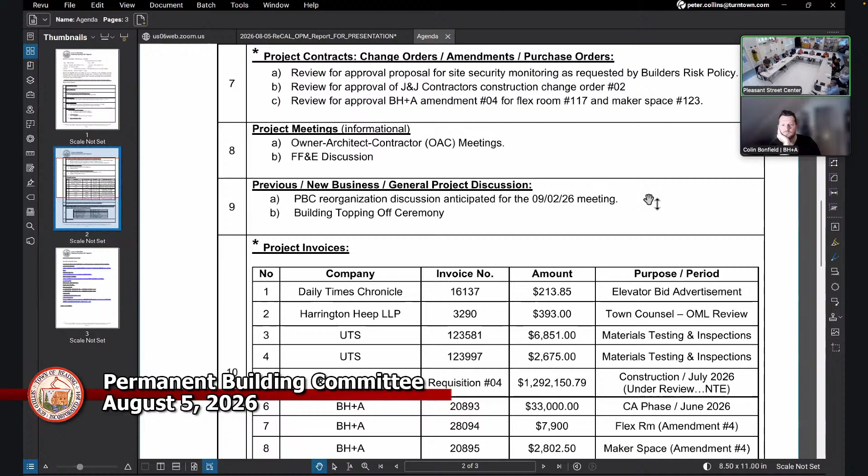Yeah, they take place every Tuesday. The town has been wonderful. Joe and Kevin have been exceptional. They're awesome, they keep everything moving. I've called them and they are there within the hour, if not sooner. They're very good.

Item 9, there are two items of discussion, whether it's tonight or another meeting. Actually, it's going to be September for the reorganization, and then a building topping off ceremony.

I guess there was a thought about doing something, I feel like it was your idea, Peter. I talked a little bit with Jane about this, and I think the thought was to do the topping off ceremony after the wood framing. They just started today, so I won't have a great idea of how fast they're moving for probably 1 or 2 weeks. After that, I can gauge how fast they're moving and when we're actually going to be done.

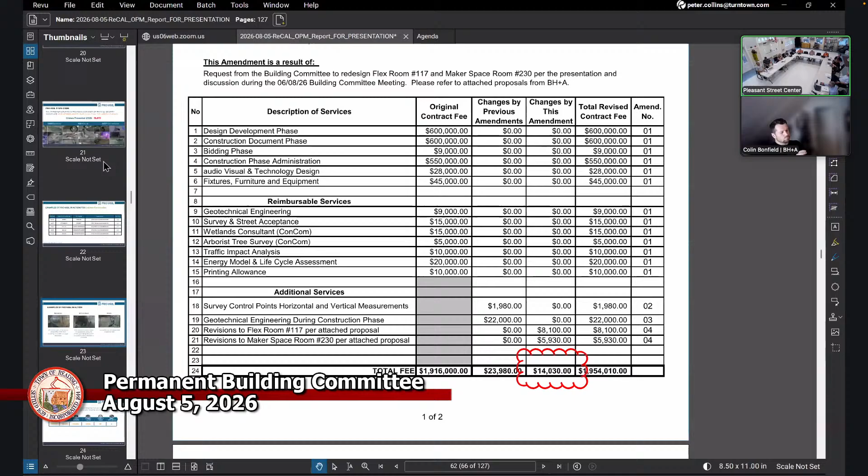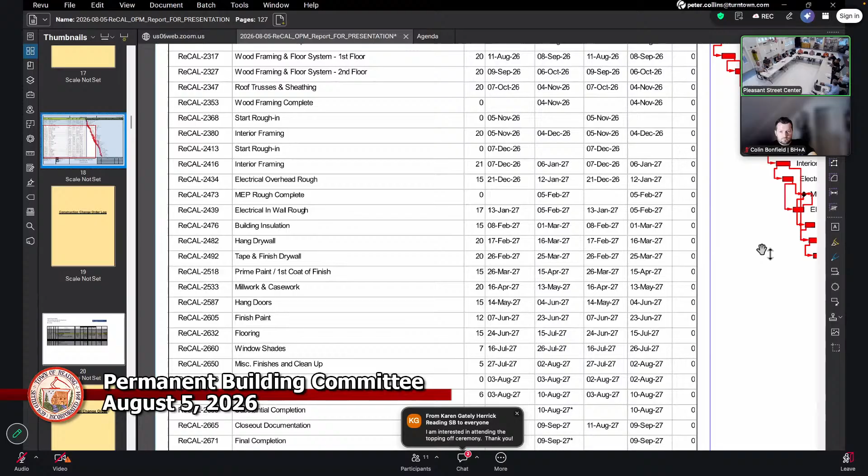Are we topping off with wood, the wood truss? That's probably the last piece of framing for topping off the building, a wood framing member as opposed to a steel framing member. But we can still sign it, right? These are the important things. We'll paint it white, Peter's really good with all that stuff. That'll be a new one, but I'm looking forward to it.

We just need some time to make sure people can be invited. Are they gonna set the trusses with a crane? If so, it's not gonna be on site very long, it'll be like a week setting trusses with a crane.

Would you like a hot dog, Mr. Coot? All I have to do is tell Jimmy and he will make them. Yeah, hot dogs, I might actually show up. It has become a bit of a tradition, we did this a month ago in Melrose. I had a hot dog when I went over there the other day for the time capsule.

Just on the schedule, according to the contractor's schedule, roof truss and sheathing, wood framing, looking at for November. That's what it says today. Okay, update to follow.

If they just started framing, maybe it's a topic for next Tuesday's meeting to see if they can give an idea of their schedule and how important it is to us, whether it's a crane lifting a truss versus a Lull. Because they'll probably be setting those trusses with a crane, but it'll be a narrow window, and they don't want to keep that crane there any longer than they have to.

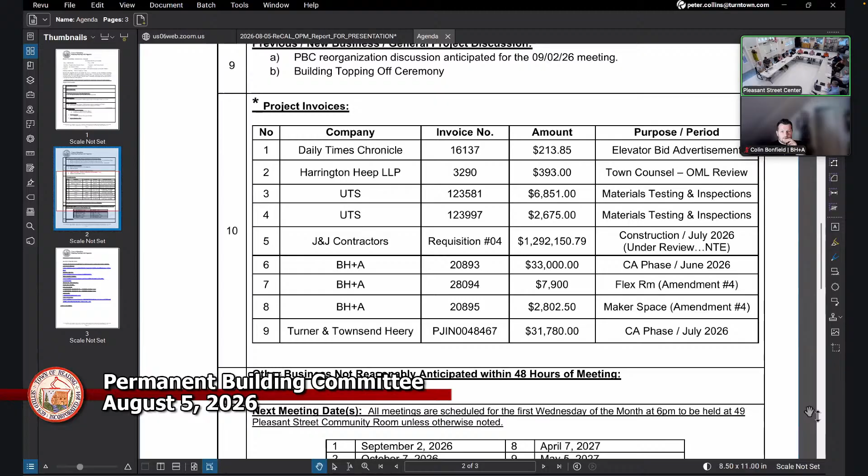Those cranes are expensive. It'll be like, we're gonna be here 4 days with the crane, that's your window. The crane's coming in, and you'll blink and it'll be gone, but I don't know how quick that is in the process, because there's a lot of wood framing that needs to get done before this happens.

Moving on to project invoices. Number one, the Daily Times Chronicle invoice given to us from the procurement office, that was from the elevator bid a couple of months ago, it's kind of a catch up. Town counsel's invoice for some services the town counsel approved or provided.

UTS invoices 3 and 4, the OPM's office has looked at those and makes a recommendation. Items 1 and 2 we acknowledge as services given to us from the town's procurement office, so we recommend for consideration items 1, 2, 3, and 4.

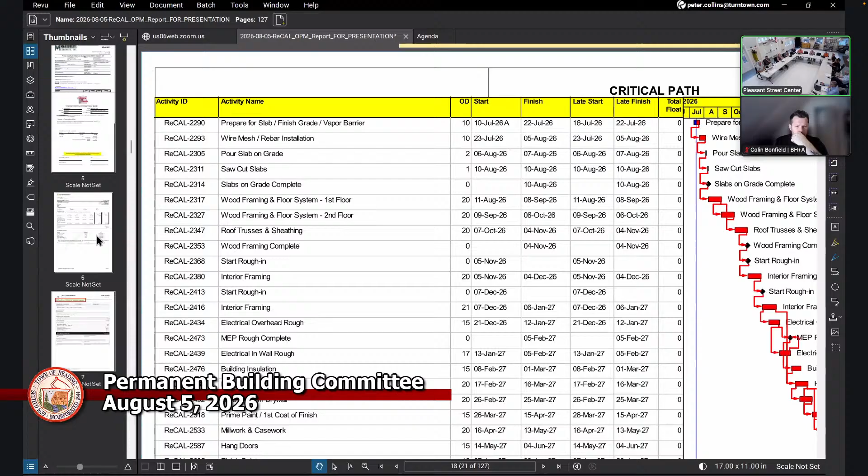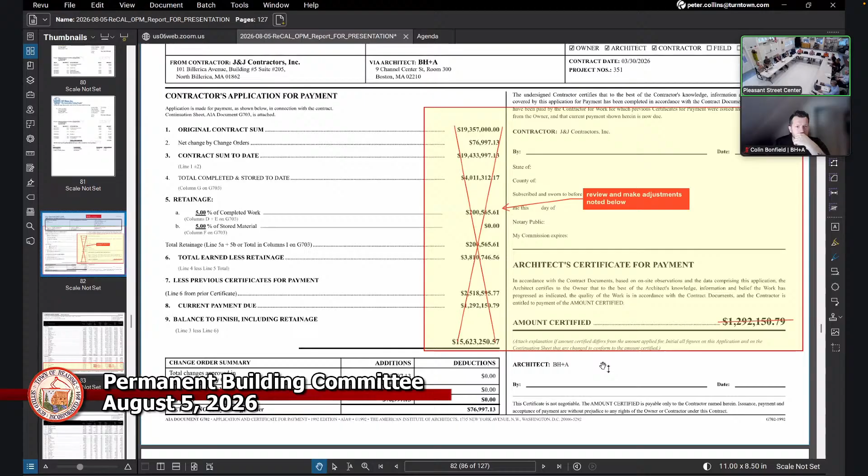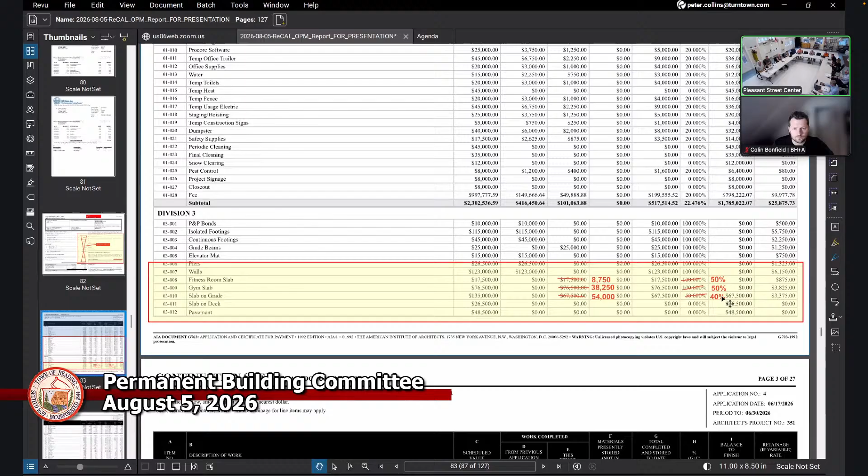The 1,292,000. We had some comments here, some recommendations, we didn't think they were at 100%, so we recommended a 50% reduction, and then down to 40% here as well. There were some other changes we suggested here, this one here.

So anyways, what I'm getting at is, because we don't have the final calculated number, we haven't finalized it, but it's not going to exceed what they submitted, which is 1,292,150.79. We feel it's going to be slightly less based on our recommendations, since some of that work was not in place. They were anticipating, for example, that the concrete would have been cast and poured.

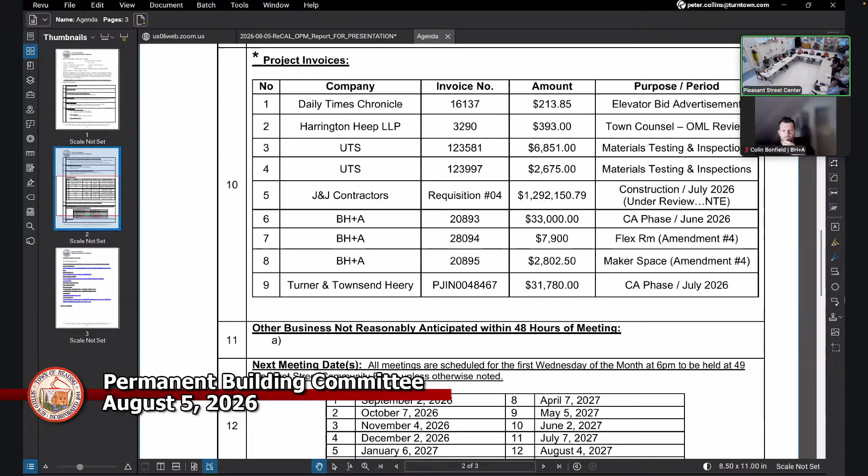Back to the agenda. We didn't have any other business not reasonably anticipated under item 11. Item 12, we got a list of the upcoming meeting dates, September 2nd. Give some thought to potential reorganization and new positions.

That's it, I'll accept the motion. Motion to adjourn. Second.

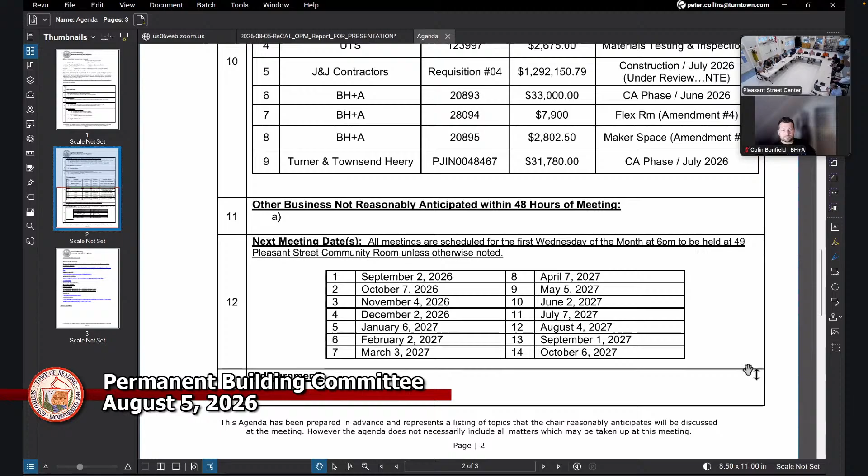John Coop, yes. Mark Doxa, yes. Kirk McCormick, yes. Mike Mazzaro, yes. Ron Powell, yes. Greg Stepler, yes. Pat Tompkins, yes. Motion passes.